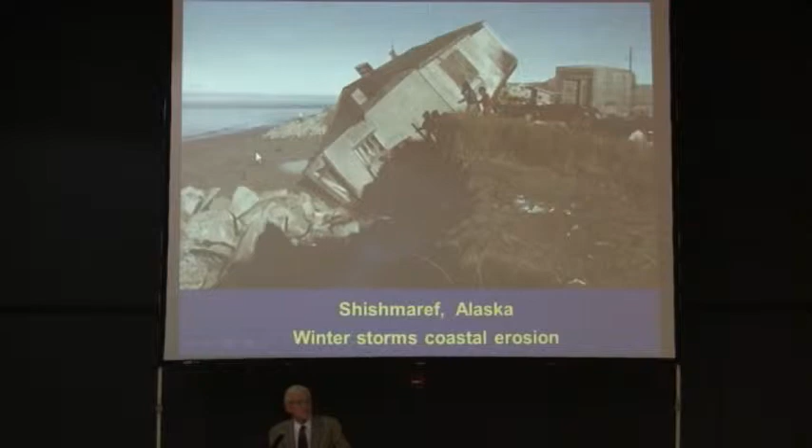Climate change has caused two reproductive seasons for the spruce bark beetle that's wiping out the forest. The ice goes out earlier in the springtime, exposing the coastline of Alaska to the winter storms. We're losing probably 10 coastal villages. This has had a profound effect upon me, a guy who's lived in Juneau, Alaska the last 43 years.

I have concluded that our responsibility as human beings, engineers, energy professionals, scientists, and business people is nothing less than converting the world's largest industry, energy, from about 85% fossil fuel to at least 85% renewable source energy, literally running the world on renewables as fast as we can, prudently and profitably. There may be some nuclear.

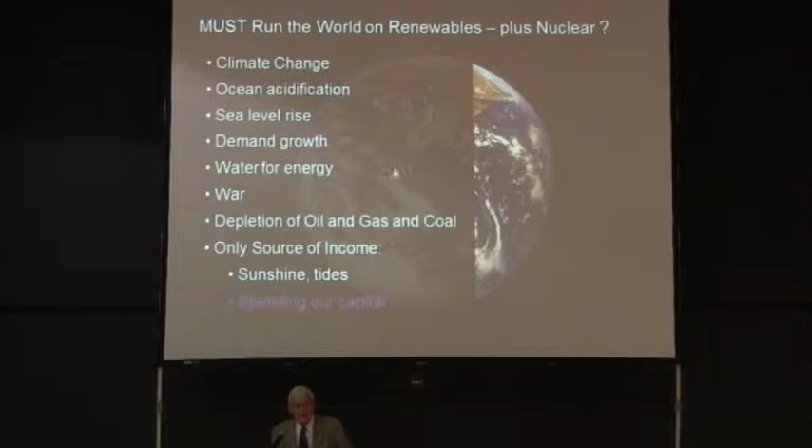It's very hard to predict that now because these problems have become emergencies. We need to move from spending our capital—eventually you'll go broke, what does that mean for our civilization—to running on income. And the only income we have on this planet is solar energy from the sun.

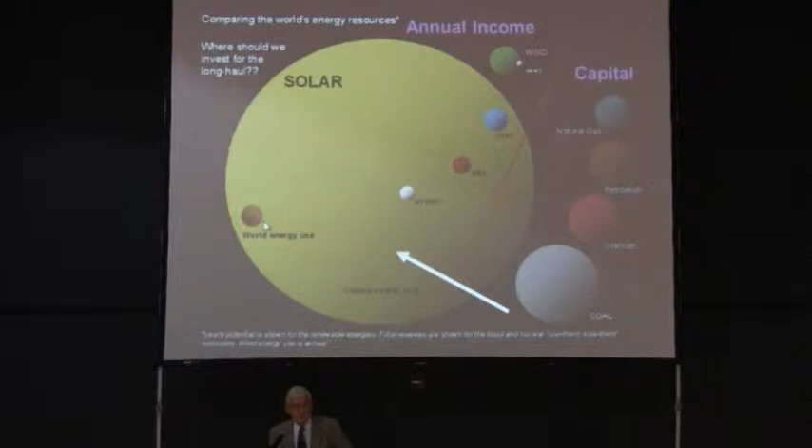This is humanity's total annual energy use, and this is the annual energy input we get from the sun. So I often title my presentations at scientific conferences, like the American Society of Mechanical Engineers, as Running the World on Renewables, Alternatives to Electricity. I ask, can we do this?

Can we run the world on renewables entirely with electricity, transmission, storage, and integration? And if not, at this time we should at least be seriously considering alternatives, moving that energy around and storing it very inexpensively as hydrogen and ammonia fuels.

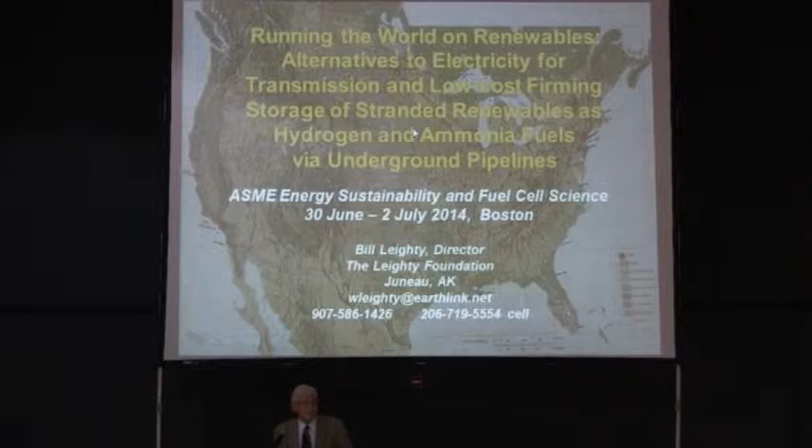The trouble with renewables, of course, is that they're dispersed. They're all over the countryside. There's a very high gathering cost, and then they're remote—the richest resources—so we have the transmission cost. And they're time varying in their output, intermittent, some have said. So we have the firming storage problem.

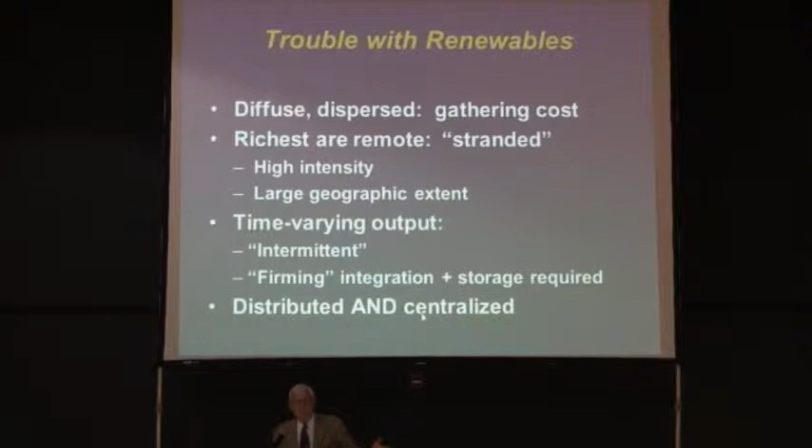In the future, we're going to use both distributed—that's the PV on your garage roof and mine—and centralized large solar and wind plants for running the world on renewables.

We need to think beyond smart grid, which is now being presented to us as the next big thing in the electricity world, some sort of a panacea, but it's primarily a demand-side management tool. It provides no new physical transmission or storage infrastructure for us, and therefore we have to think beyond electricity systems into complete energy systems, moving air and water molecules and photons to energy services delivered.

Nobody wants to buy a kilowatt hour or a liter of diesel fuel. We want the energy services that they provide—to provide all of humanity's energy from renewables.

We need to think beyond transmission as wires. After all, if your only tool is a hammer, the world looks like nails. If your only product is electricity, wind and solar, the world looks like wires. We need to think beyond that.

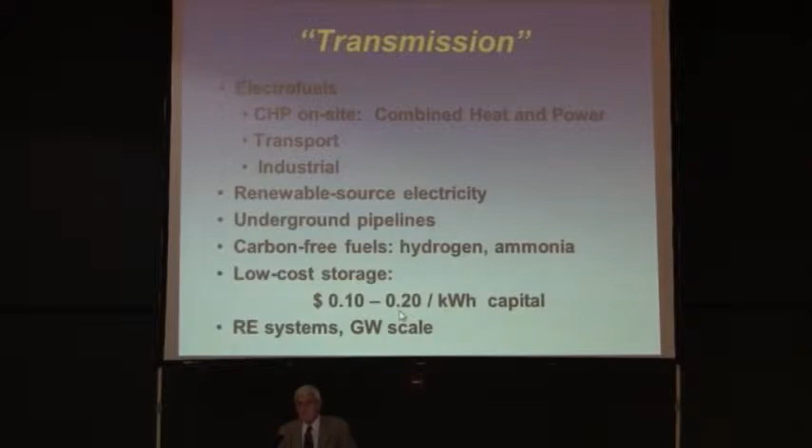Because low-cost storage is available to us as hydrogen and ammonia, these large anhydrous ammonia tanks that we have around the Corn Belt can store energy at 10 cents a kilowatt hour capital cost. And we can store it as hydrogen in solution mined salt caverns for about 20 cents.

So we need to think in the context of complete renewable energy systems, and I just happen to have one with me.

Perpetual motion—this has been running on our artificial sun over here. This is a hydrogen system, not an ammonia system, but we must wonder, is the abundant and low-cost renewable energy of the future going to be available to us primarily as electricity, or perhaps as hydrogen? Because there are many ways of producing hydrogen from renewable sources as well.

Now you can see the sun has gone down. We no longer have energy input to the PV panel, and yet the system is running. So clearly, we've demonstrated perpetual motion at this time, or perhaps there's hydrogen storage in the system. So we'll let you place your bets on how long this will run.

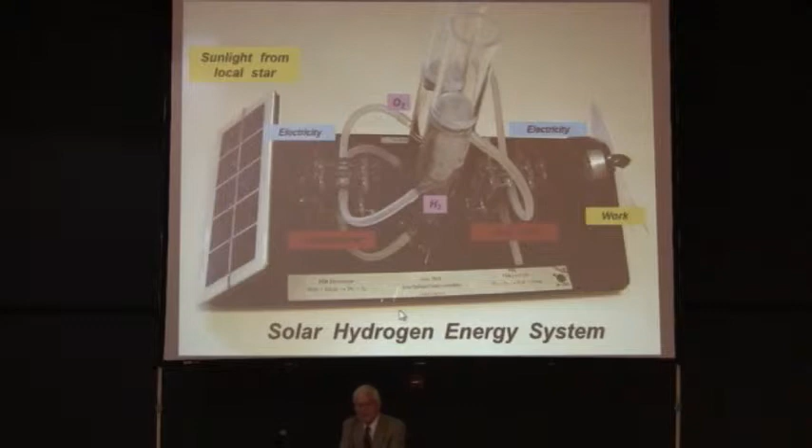The point is, we have to think of complete renewable energy systems. I'm going to present to you a landscape assessment of what renewable source ammonia looks like now, talk about a project our small company tried to do in the state of Alaska, talk about complete renewable energy systems as we have so far, and a conference I attended in July of this year representing the Ammonia Fuel Association on artificial photosynthesis in the UK.

And then a study that Ag Ventures Alliance, right here in Iowa, hired our small company to do to investigate a wind to ammonia prospect. It's very windy in Iowa. Is this a good place to get started making ammonia fuel?

From this project, our technical engineering and systems integration company, Wind2Green, took a synthesis technology survey, their own landscape survey, on how to make ammonia from hydrogen and electricity. And then, as a demonstration project, why don't we get our hands on a couple of ICE gensets and have Eddie Sturman or Ted Hollinger convert those to run on 100% ammonia and deploy them in some visible place, working on the demand side of the ammonia equation as well as the supply side.

In Alaska, we have more renewable source energy than any place else on Earth. We have more coastline than all the rest of the US put together. It's very windy out here in the Aleutians, and the Asia market is not too far away. We also have over 150 energy islands in Alaska. These small communities have no connection to the outside world, no transmission system, no road system.

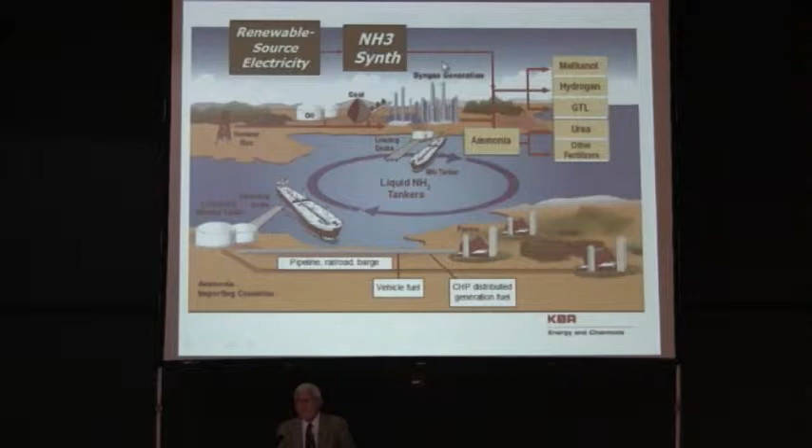They're living on imported fossil fuel for heating as well as for electricity generation. It's typically at $6 to $12 a gallon landed cost. And if we could harvest Alaska's vast renewable resources and convert it somehow from renewable source electricity or hydrogen into ammonia, then we could participate in the global trade.

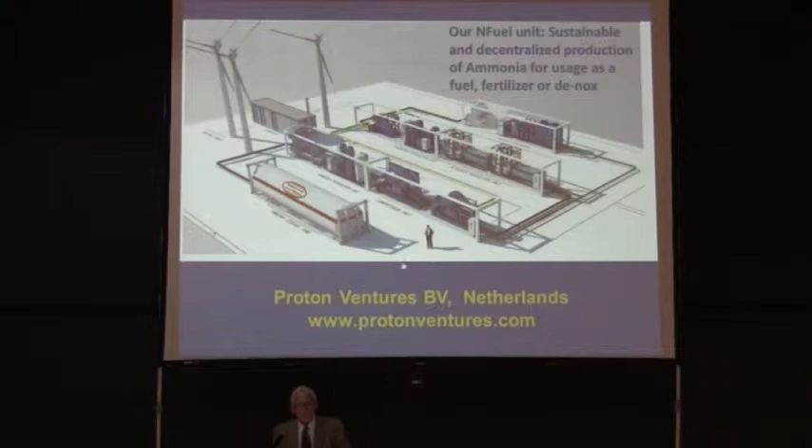In my experience and that of others in Alaska, we can't deploy in an Alaska village, a small community of a few hundred or 1,000 people, a very complex system that electrolysis Haber-Bosch would be. This is the implementation by our friends at Proton Ventures in the Netherlands. It may be wonderfully appropriate in some places, but probably not in an Alaska village.

Therefore, our company proposed to the Alaska Energy Authority several years ago, in response to the funding opportunity they had in what they call the Emerging Energy Technology Fund, that we build a demonstration facility, a small pilot plant in a Connex container, so it would be transportable around Alaska, and it would bring in renewable source energy.

We've got a big switch here. Either we switch it up and convert it into renewable source ammonia and store it in a steel storage tank, or we flip the switch the other way and we run the ammonia from the storage tank through the ICE genset and put it back into the local renewable energy grid, demonstrating that this could be done economically, technically, feasibly at the village scale.

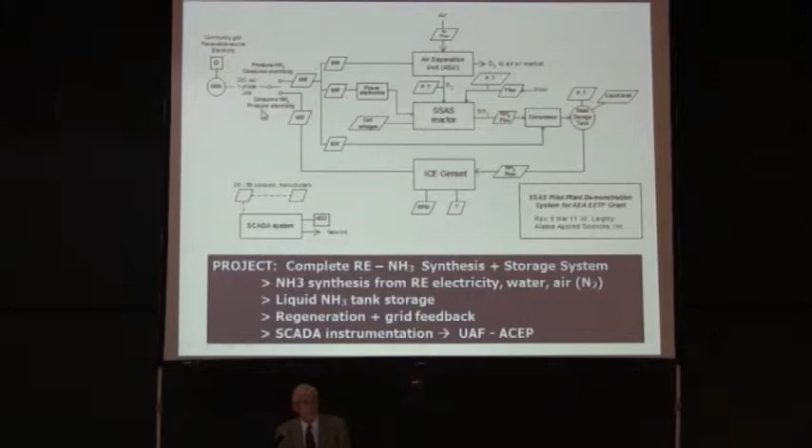Now this would have only been a few kilowatts input. It would just have been a pilot plant, a demonstration, concept to demonstration. It was a $1 million project.

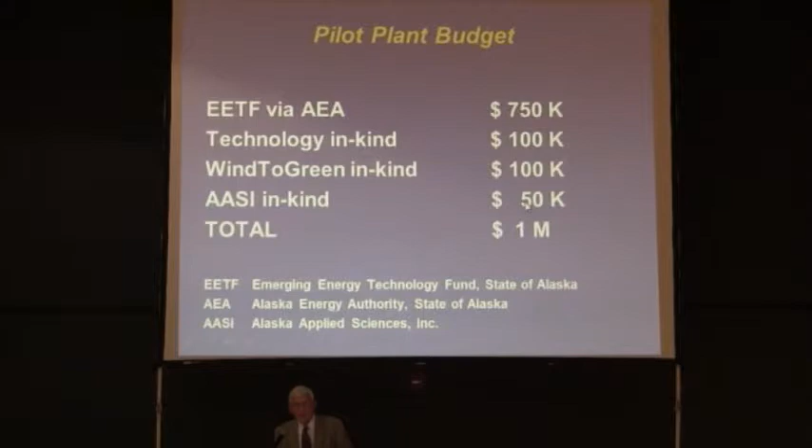This is $750K our company was designated to receive from this Emerging Energy Technology Fund program. The technology supplier would have to put in $100K in the proprietary components by which the ammonia would be synthesized, and then our system integrator designer would put in $100K of IP in the reactor design. We would put in some management, and it came to be a $1 million project.

Unfortunately, the technology was simply not available, and we had sold this project to the selection committee by saying, we understand you want TRL4, technology readiness level. You said that. We think the technology we're proposing is at TRL 2 or 3. If you'll select our project, we will agree not to begin the project, not to sign the grant agreement until we've proven that the basic technology works. And since we didn't, we couldn't get to milestone 1, so we gave the money back essentially on December 11th of last year.

But WindToGreen, our system integrator, said, let's do a technology survey of all that's available and other ways. There are many ways, as we've already heard today, of synthesizing ammonia other than the Haber-Bosch method. And darn if every report they came up with didn't conclude with, we need better catalysts, as if there's some sort of needle in the haystack out there that can be found if we only had a more powerful magnet. So there are many new methods and pathways to ammonia synthesis, although all of them seem to be stuck at the TRL, technology readiness level 1 to 3.

And therefore, the lowest risk at this time is electrolysis plus Haber-Bosch, which we abbreviate EHB. It's going to be a very long haul in money and time to bring some of these other technologies to the point that they're of high technology readiness level, ready for commercialization. Many of these are going to result in high cost ammonia at the plant gate.

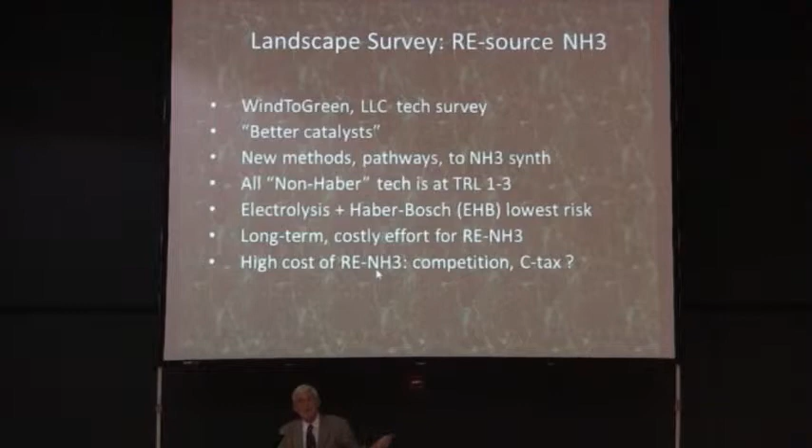With what will it compete? Will it compete with brown ammonia made from natural gas, long-term contract, $1 or $2 per million BTU stranded gas in Australia? If it can't compete, what's the point? What's the market? We have to have markets.

We don't know whether the sources for ammonia synthesis are going to be primarily electricity or primarily hydrogen. If we have hydrogen, great, we can go directly into Haber-Bosch or some other synthesis method. If it's electricity, we're probably going to have an electrolyzer in the system.

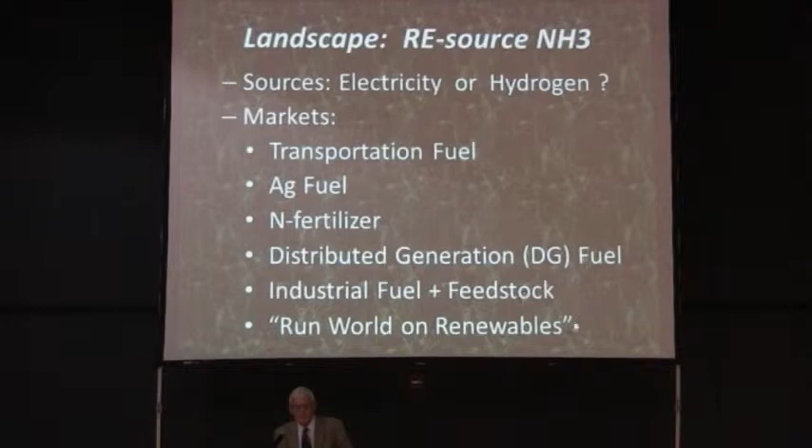Here are the obvious markets. We've talked about many of these, and all of these combined would point us on the way to running the world on renewables. There are many carriers and storage strategies for renewable source energy.

Obviously, electricity, gaseous hydrogen and pipelines, where the pipelines themselves are storage because you can pack the pipeline pressure.

Ammonia, and the Japanese, as we've already heard, have a very interesting concept of moving hydrogen from stranded locations, carbon-free, to Japan as a cycle on commodity tankers on the sea, starting with toluene, hydrogenating it at the renewable source to methylcyclohexane, C7H14, returning it, dehydrogenating it on the ground in Japan, putting it back in the tanker and moving it around. So mole for mole, liter for liter, you're bringing hydrogen to the home islands.

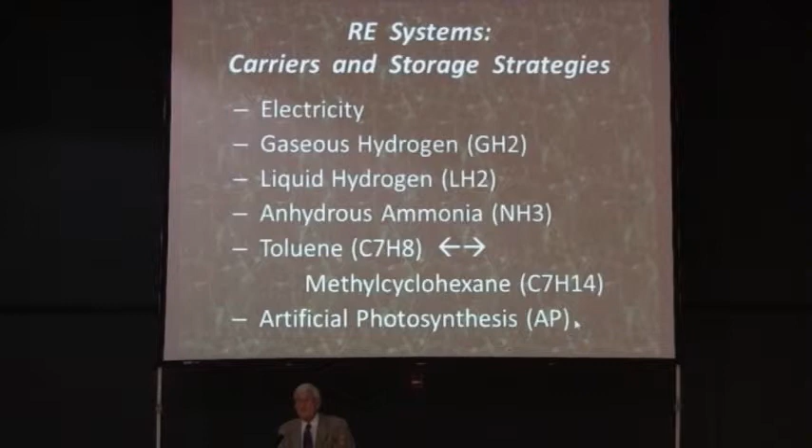And artificial photosynthesis, the first step in photosynthesis is water splitting. You're making hydrogen and oxygen. So is that going to be some way a source and a carrier and a strategy for moving renewable source energy around?

The organizer of this conference, Tom Faunce from Australia, invited John and Norm to send somebody representing the Ammonia Fuel Society to this meeting of the Royal Society. You might remember that's Isaac Newton's group at Chicheley Hall in the UK. This was our venue. It was tough to put up with, but that's where we were.

Their title was a Global Artificial Photosynthesis Project, trying to avoid the IP fights that have emerged and have stalled progress on so many other technologies as the lawyers and the patent trolls go after each other.

The title of my presentation was, what shall we do with the photohydrogen that you would make, you artificial photosynthesis people, as the first stage in your process? Do you want to take CO2 out of the atmosphere and make hydrocarbon fuels? If so, they can only be used in Carnot engines with relatively low efficiency. Or shall we sell the hydrogen directly? Or shall we make it into ammonia so it's more economically transported?

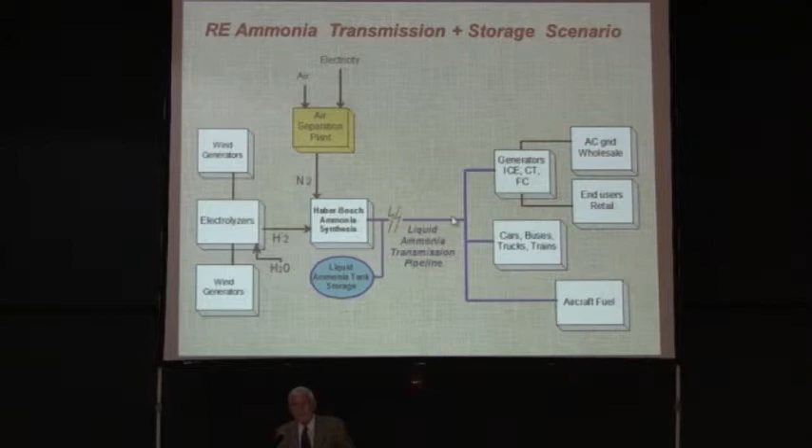This is the obvious way that you would make ammonia. Wind or other renewable source generators make hydrogen, air separation unit, transport it by pipeline to distant markets. The electrolyzers have been available for a long time, and as we heard, they're becoming available again in sizes and configurations that would be convenient for this purpose.

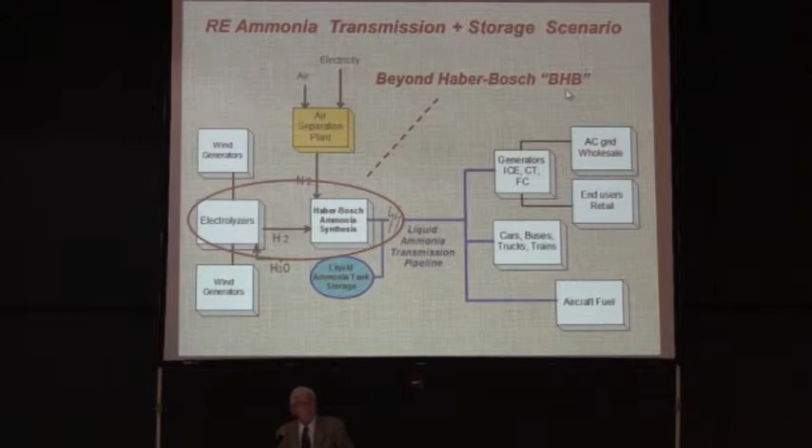Electricity and water come into the electrolyzer, nitrogen from the air separation unit, Haber-Bosch reactor, and out comes the NH3. If we could combine these two in some sort of technology beyond Haber-Bosch, we've coined the term BHB. Everybody has to have an abbreviation, beyond Haber-Bosch. Whatever this technology is, now it becomes a lot simpler.

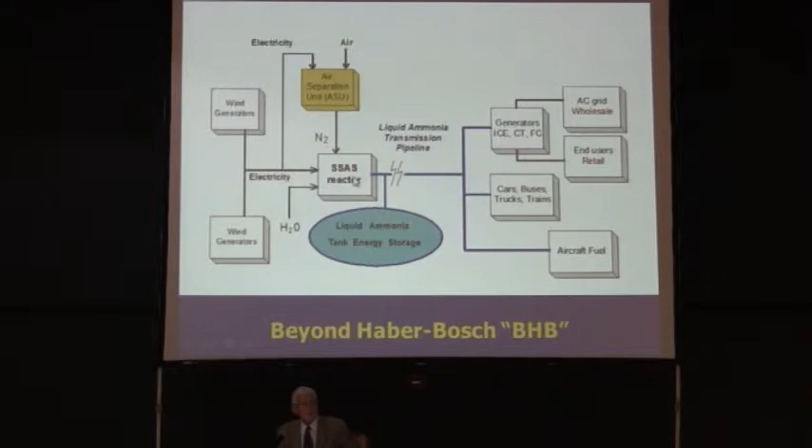This is the term that John's group uses, solid-state ammonia synthesis, some sort of a reactor that's beyond Haber-Bosch, so that we don't suffer the high temperatures and pressures that are necessary for the Haber-Bosch process.

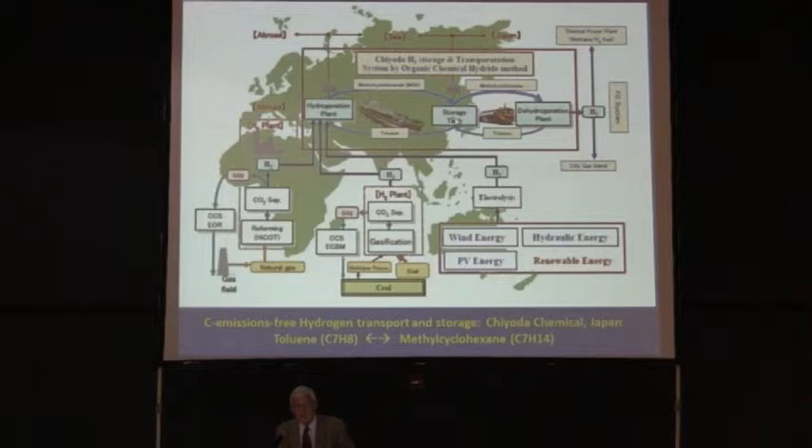Here's the cycle that the Japanese, via Chiyoda Chemical in Japan, are proposing, where they have a hydrogenation plant, this could be floating wind machines in the Aleutians in Alaska, to a tanker carrying methylcyclohexane to a storage tank in Tokyo Bay, say. They dehydrogenate it and send the toluene back around to be rehydrogenated at the renewable energy source.

So Wind2Green convened a technology advisory group. Jack Swearingen is a friend of John's and a retired national lab scientist, and he's got a lot of buddies that needed something to do. So they convened this group to do a landscape assessment of the other technologies out there.

Nafion is not particularly good for ammonia compatibility. This is the one primarily used in the PEM fuel cell for hydrogen fuel cells in cars, because it's an acid and ammonia eats it, so that's not compatible. But there is an ammonia compatible polymer proposed by the University of Minnesota, so there are perhaps solutions available. You would put this together in a membrane electrode assembly similar to the PEM fuel cell.

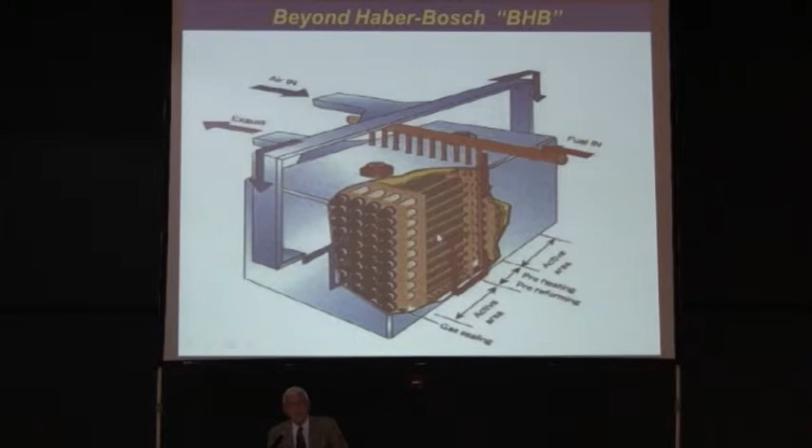A gentleman, professor at University of Wisconsin-Madison, says we put diamond nanoparticles on the surface, then we can get very small catalyst particles to cling to that, and the diamond itself is a catalyst, so it's another potential method.

These two are a little bit hard to pronounce. This one is from Japan, this one is from ETH in Zurich. I really don't understand what these technologies are, but they're in the catalog. Cyclic pressurization.

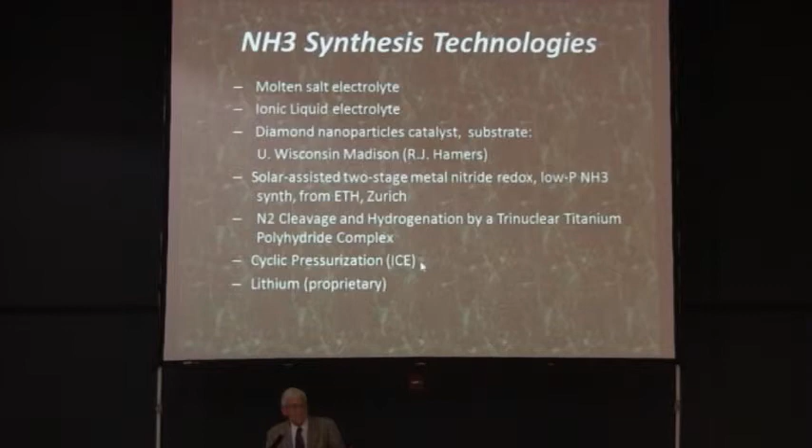If you had an ICE with very clever and intelligent valves, could you compress the air enough -- rather compress the hydrogen-nitrogen mixture enough -- that you would synthesize ammonia right in the cylinder? And there's a proprietary method based on lithium.

What if we had hydrogen to feed our Haber-Bosch process from artificial photosynthesis? This is exactly what the Joint Center for Artificial Photosynthesis at Caltech is looking at. They're doing a catalyst search, sort of a needle in the haystack random search, to try to find something by accident that is a better catalyst for the water splitting with photons reaction.

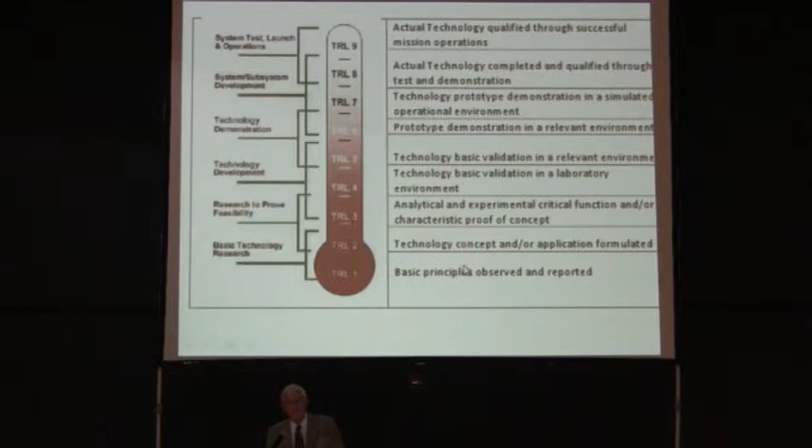That sounds tough, sounds like money and time, doesn't it? Here are the definitions. This is something invented by NASA, which you're probably familiar with, to try to filter the wheat from the chaff and find things that might be useful to them.

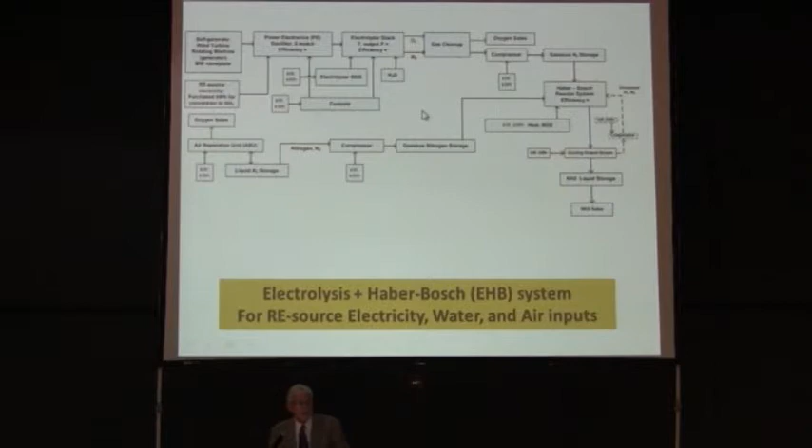This is the definition that I proposed to my client, the Ag Ventures Alliance in Mason City, when they said let's do a study of electrolysis Haber-Bosch from wind to ammonia. I said, this is the electrolysis Haber-Bosch system as I understand it. Sorry you can't read it -- it's on my presentation, which you're welcome to take off the thumb drive with you.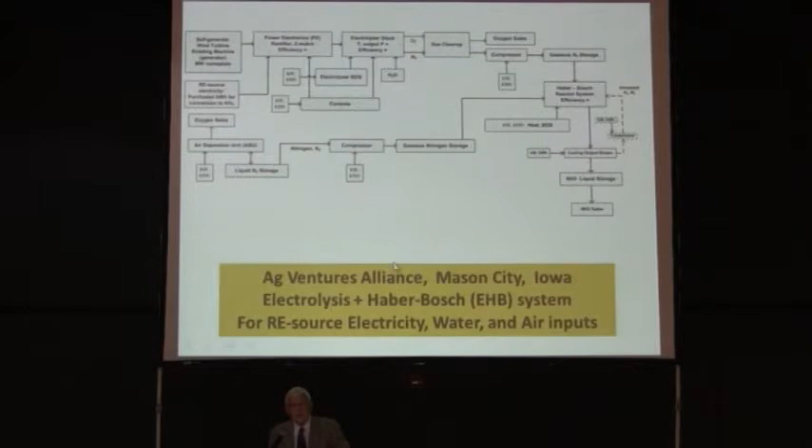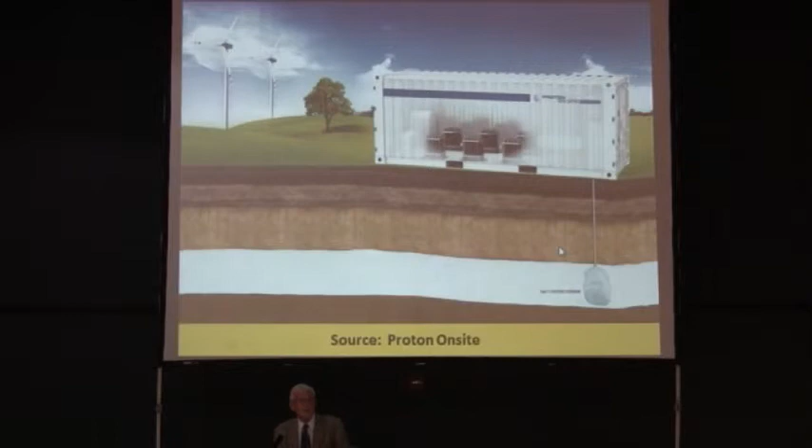So this is the study that I did for Ag Ventures Alliance. Part of the study was putting together a simple Excel model based on something that would look like this. Here are the wind machines, here's the ammonia synthesis. In Iowa, you don't have salt geology for inexpensive storage, but there would be some other kind of storage of the ammonia itself. Here they're storing hydrogen, which then would act as a buffer for a system like this.

I was assigned a price of $650 as the plant gate price for ammonia produced from wind energy in Iowa, as if this is the benchmark retail price -- good as any -- that prevails in Iowa at this time, $650 a ton retail to the farmer. And as you can see, it's varied over the years.

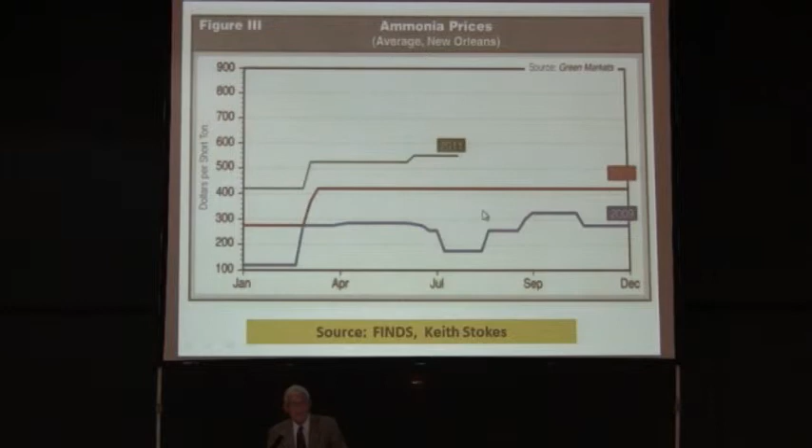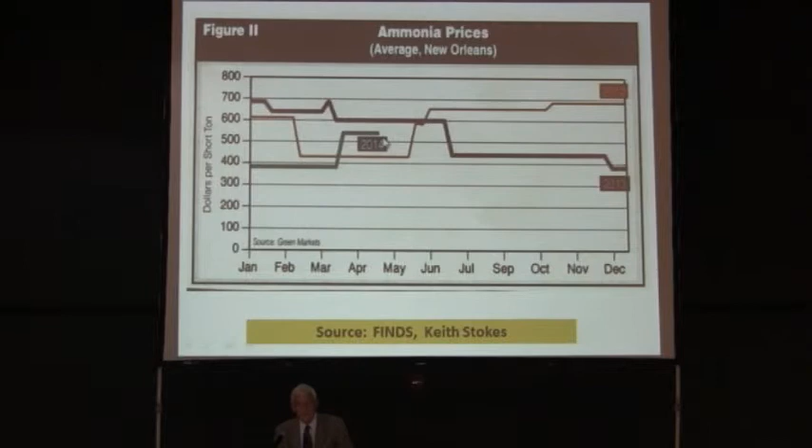This is from Keith Stokes Group, FINDS -- it's a very nice publication. You can see the prices varied: here's 2012, here's 2013, and 14. Here we are today, 2014, $550 a ton. Those of you who know the ammonia market in Iowa might know better, but it is possible to track these prices -- that's at the terminal in New Orleans.

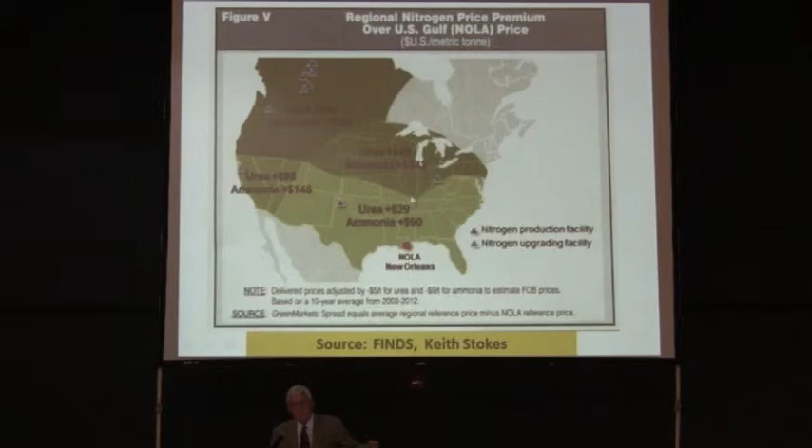Here in the Corn Belt, you add $142 to that average for the cost of getting it to Iowa, transporting up the Mississippi on barges or in pipelines, and then selling it at retail. So that's where we get close to the $650.

I analyzed two cases based upon this simple Excel model I put together. We handled the capital expenditure, which can be very complicated depending on the ownership of your capital assets, by simply using a capital recovery factor. Tell us what capital recovery factor we should assume, somewhere between 8 and 18%. That includes the cost of capital, whether it's debt or equity, and it includes overhead and other O&M costs. It's a very simple way of trying to establish whether something is reasonable or not. So this would be the total annual cost.

Case A is if your enterprise owned the wind plant, so you are making your own electricity and then converting it to hydrogen and ammonia from your wind plant. Case B was, let's assume we can buy all the wind energy we want at 5 cents a kilowatt hour, or solar, or whatever renewable source energy.

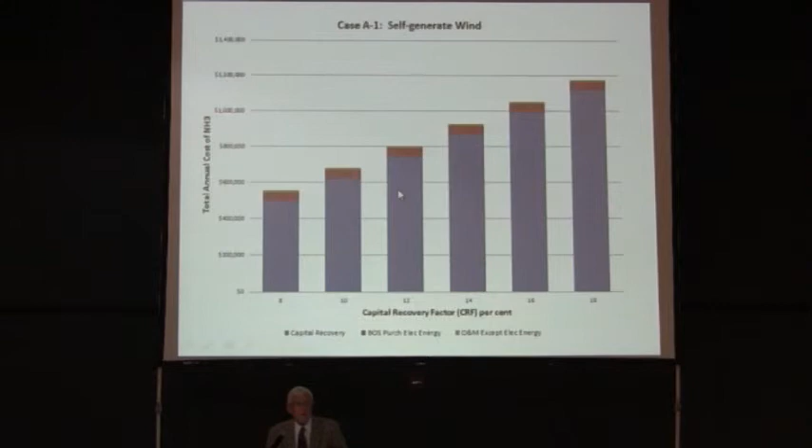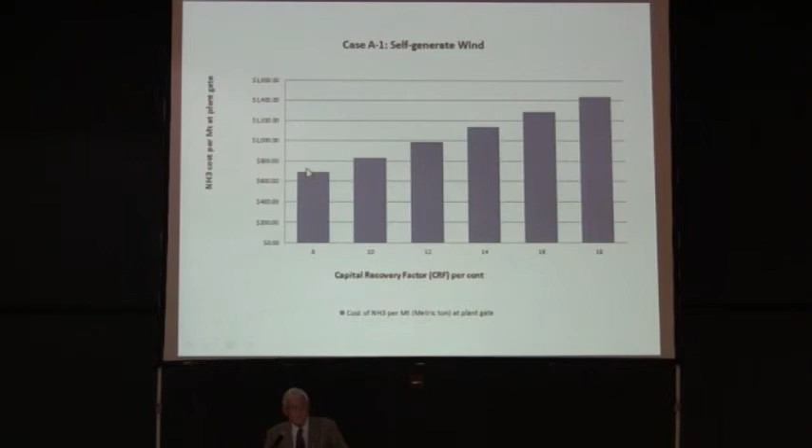So you can see most of the cost is in capital recovery. There's no fuel cost because we're not buying much energy. Depending on your capital recovery factor assumption, you're somewhere between $650 and $1,400 a ton. This is the cost per metric ton at the plant gate. So you're barely competitive, maybe, down here, if you can assume a low capital recovery factor for your enterprise.

What if there is no grid connection? If we're going to supply all of our energy to our ammonia plant and not sell any to the grid, we can save a lot of money by not putting the infrastructure in the ground and the substation and the transmission line.

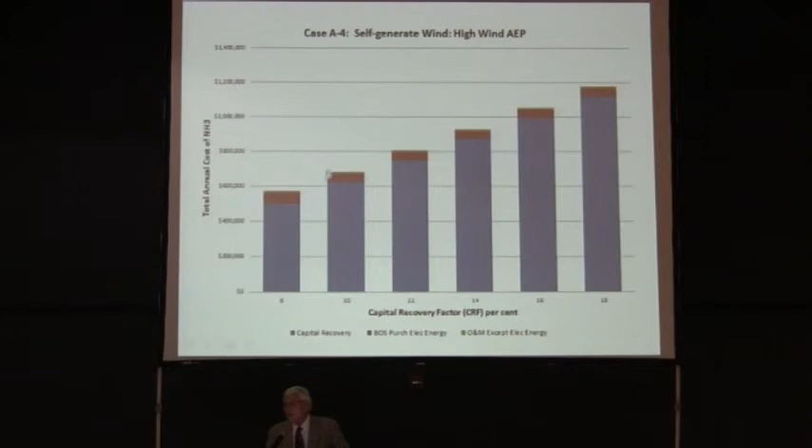What if we have a high wind resource with a very high annual energy production from the wind? Now the costs go down. And the selling price now we're down below, slightly above $500 a ton if we have a high, rich wind resource.

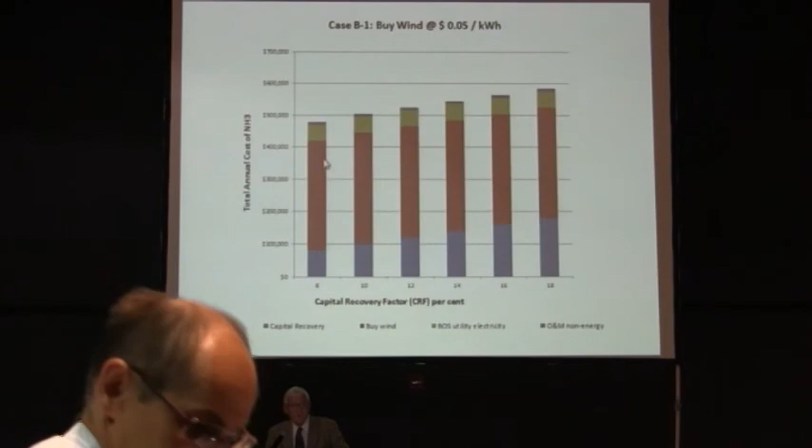Case B, what if we buy all of our wind energy at 5 cents a kilowatt hour? We don't own a wind plant, we're just buying it from those who have it. So now most of our cost is in the cost of buying the wind energy. Here's our capital cost down here.

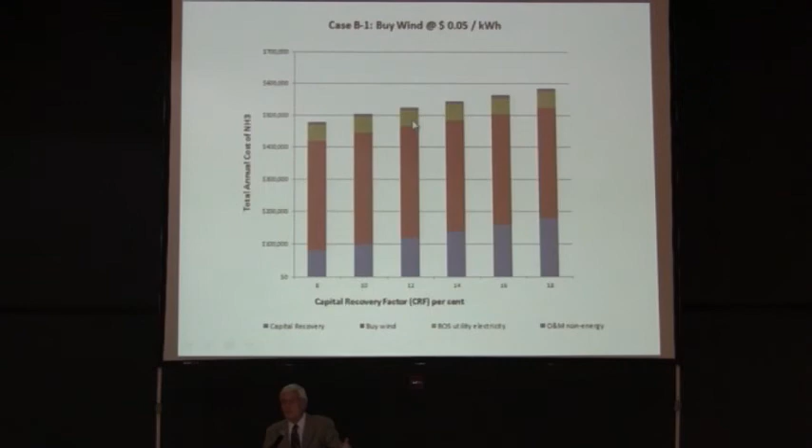We have to buy some electricity now just to keep the lights on and keep the control systems running because we're not making our own electricity. We're going to have to buy that from the local utility. We can't buy it from our wind supplier because sometimes the wind is not blowing. So that's one of the assumptions we made. And this is O&M cost up here.

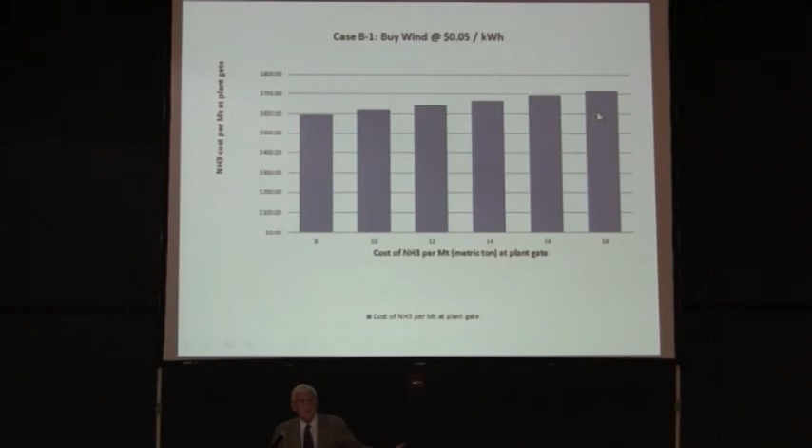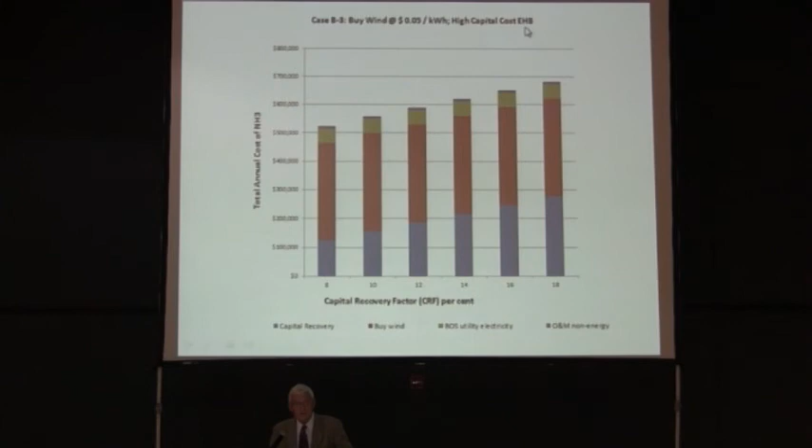So now our cost, if we're buying wind, for the ammonia delivered is somewhere between $600 and $700 a ton at the plant gate. Now this is green ammonia. If there's ever a carbon tax in the future, or if some customer is willing to pay a premium, like Google, to run a server farm so that they look green, for our green ammonia, then maybe this is a competitive price. Here we assume a higher capital cost for the EHB system than I had otherwise assumed, or higher than if the capital cost of the electrolysis Haber-Bosch system is greater.

So this is our landscape assessment. This is what we've looked at today in our brief journey through the future of renewable source ammonia. It would be very good to have some ICE gensets so that we could then talk to people about complete renewable source systems from the sources to energy services delivered, not just the kilowatt hours or liters of ammonia.